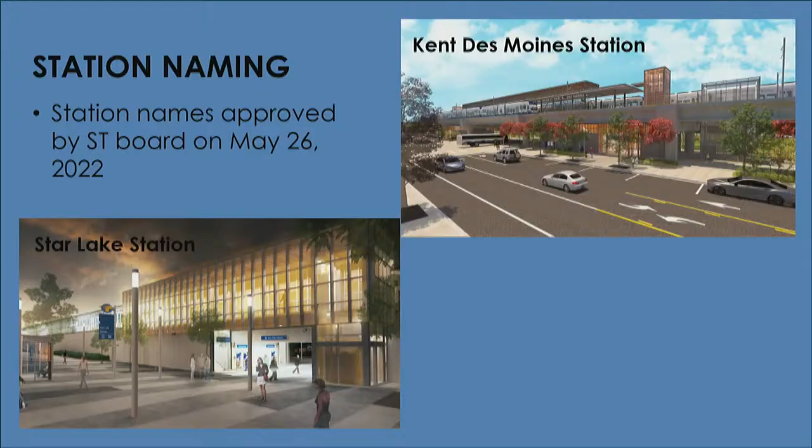A little bit about permit revisions. As part of the design-build process, there's a lot of permit revisions that come in as design progresses. There's been about 785 for the entire Federal Way Link Extension project, about 171 permit revisions for Kent. Within those permit revisions, there are many design changes and smaller revisions that we review. Derek and I do that on a daily basis, look at them and approve them, and then those get gathered and incorporated into a permit revision. So that 171 number is a little misleading, there are many, many of those, and those revisions are ongoing through the process. There's about 168 permit revisions that are in the works. So lots going on.

Kent Des Moines Station and Garage update.

A lot of the work that's happened since April you can't see, it's all underground. Lots of utility work has happened—water, sewer, storm drainage, communications, power, gas, all that kind of stuff underground. That's nearly complete on the Kent Des Moines Station area.

Structure B, which I'll show you again where that is—that deck is complete, being prepared for track. The garage concrete work is complete to the 4th level, so that's a big milestone. The garage is basically built, at least the concrete pours are completed, and the large crane is demobilized off the site. Now they're working on the canopy and some framing and whatnot on the garage.

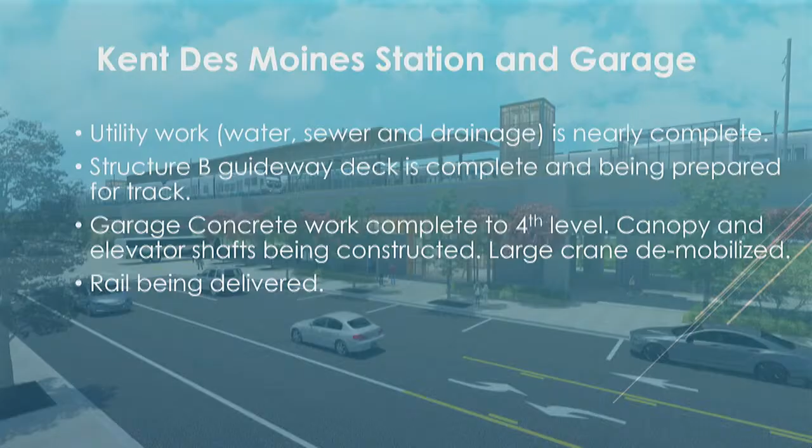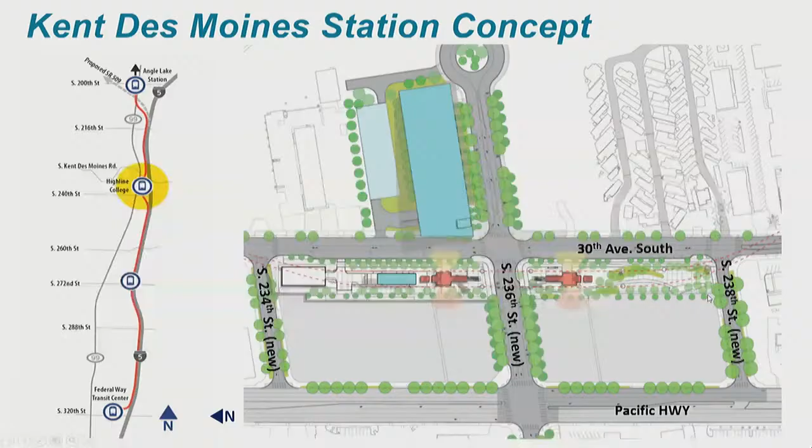That's kind of a schematic of the Kent Des Moines Station that you've seen before. North is to the left, my left, 30th Avenue up here, Pacific Highway down below, and then there's three new roads connecting between 30th Avenue and Pacific Highway. This is kind of the general alignment.

It's a little hard to read, but that's the general alignment of the Kent portion of the Federal Way Link Extension. Starts here at Kent Des Moines Road, continues down through the Kent Des Moines Station area, continues back here behind Lowe's, continues past the landfill, and continues all the way down to the Star Lake Station at 272nd.

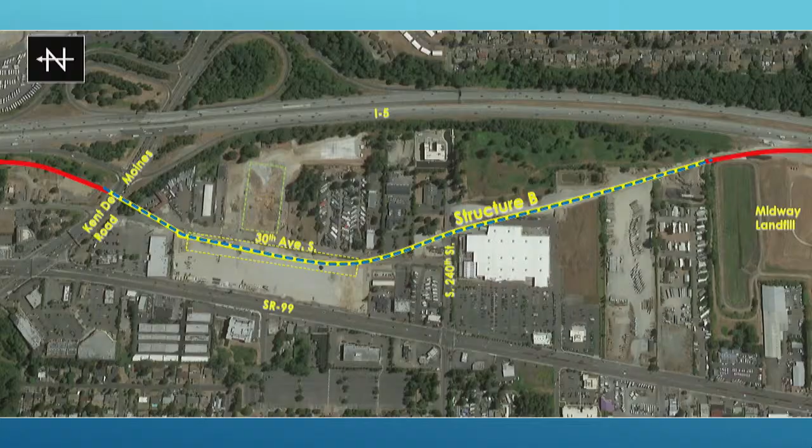This is Structure B. Structure B includes the bridge over Kent Des Moines Road, and the guideway through the station area, back behind Lowe's, and then ends at the Midway landfill. From the Midway landfill south, it continues kind of at grade or fill in between walls.

This is a picture looking north towards KDM Road. As you can see there, the deck is complete on the guideway. The railings are in and getting ready for track. So lots of progress there.

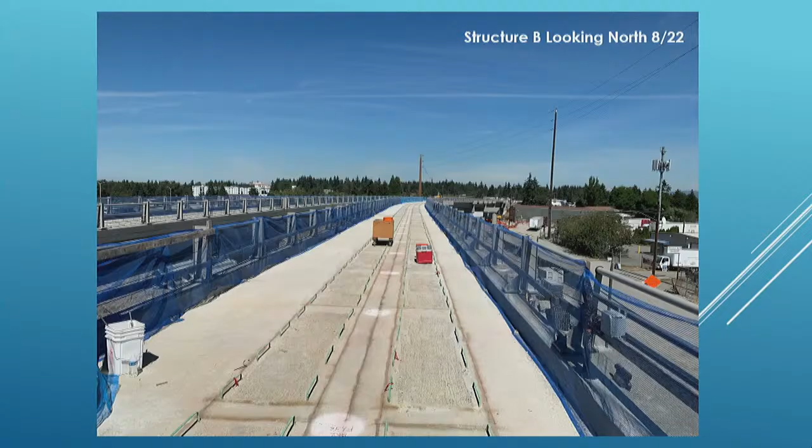There's a picture standing on the deck. Derek and I were able to get up there and look at the deck, which is really cool. You can see there, that's where the track's going to go. They're starting to pour for what they call plinths, which are kind of like the railroad ties, but they're concrete. Those are going to go where the rebar is sticking up, and then the rail goes on top of that.

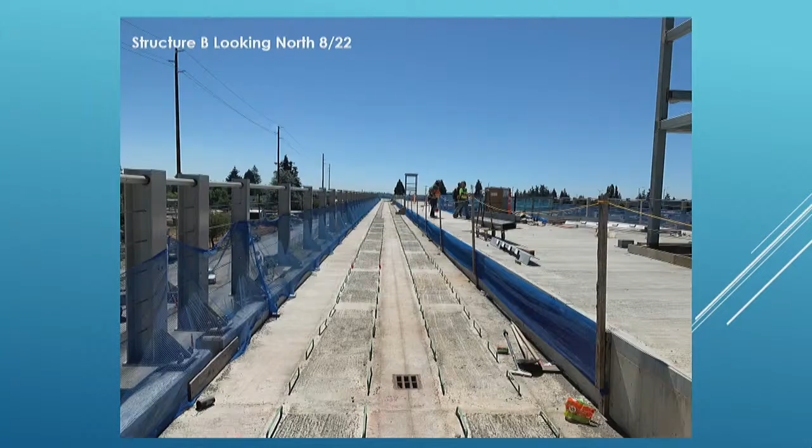There's another picture of the track next to the station platform on the right. And another picture of the track where the tracks are coming together north of the station.

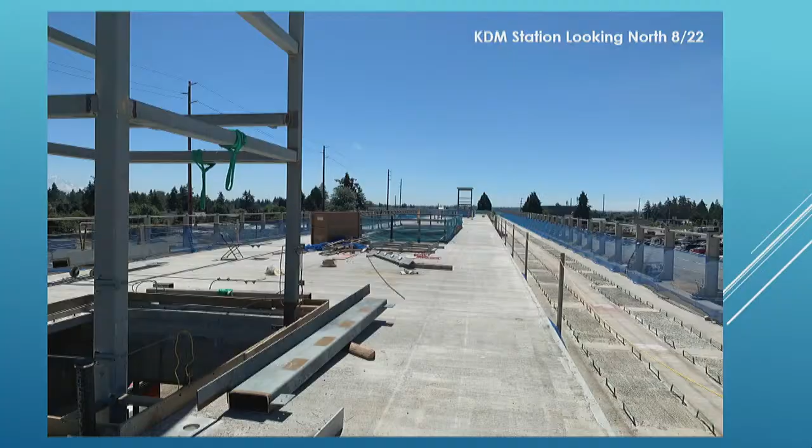And then there's the station platform. There's the north and south elevator shafts. You can see here and here, stairways in the middle, and then tracks are at either side of the station.

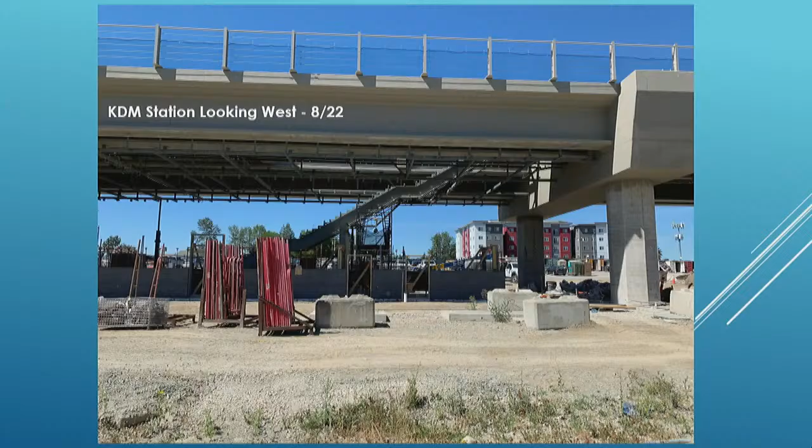And there's underneath the station, looking west. As you can see, they've got the stairway built, and a lot of the framing for the roofing and getting ready for the walls as well, the soffits.

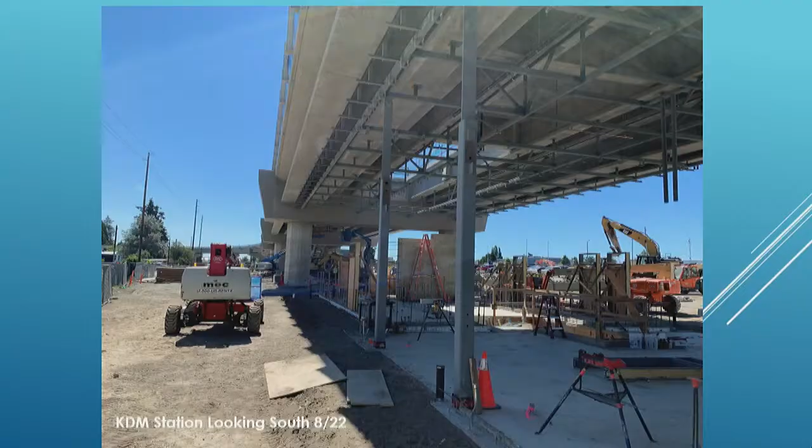And another one looking south, kind of southwest, at the underneath of the station area. We're standing at about 30th Avenue right here. So you can get an idea of what the station's going to look like. The next slide will kind of show that.

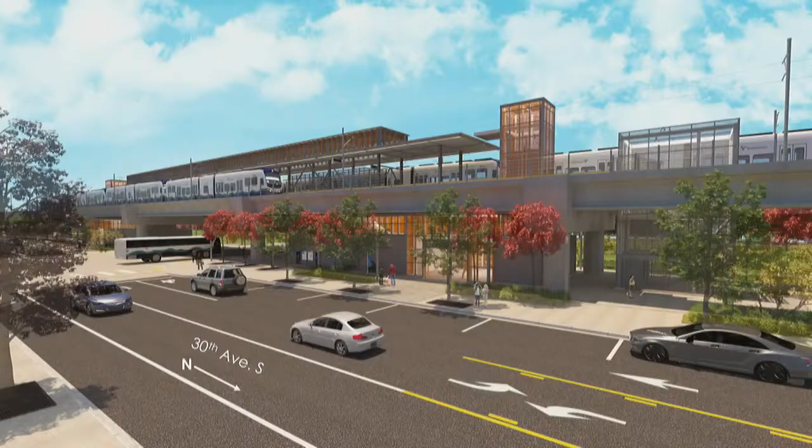So there's a rendering I think you've seen before of that. You can toggle back and forth, kind of visualize what it's going to look like. It's getting to that stage where you can see the final product.

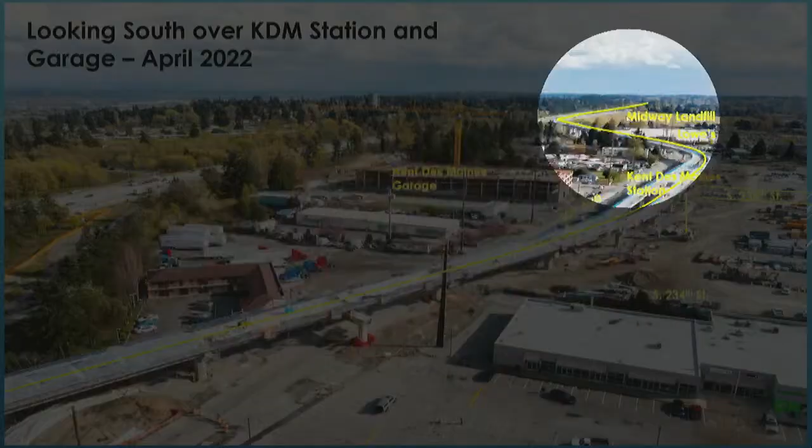So I have some before and after pictures here from April until recently. This is one looking south over the KDM station area—garage is there, there's the station here, this is the guideway. As you can see, they're still working on the final floor of the garage, finishing up the decking on the guideway and the station.

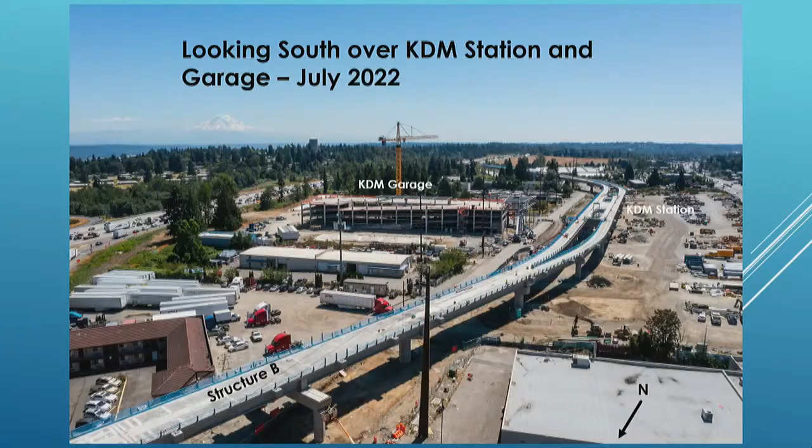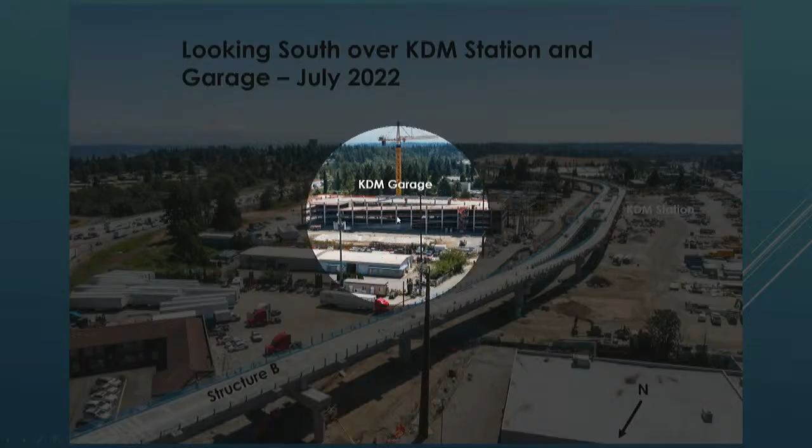And then here's a picture from July—this is the city's drone images here. The decking and station you can see are much further along, getting more completed, getting ready for track. The garage is pretty much built, the concrete anyway. And then they're starting here, as you can see, just the canopy in the front, some of the framing on the top of the roof for the solar panels, and other work is going on there too.

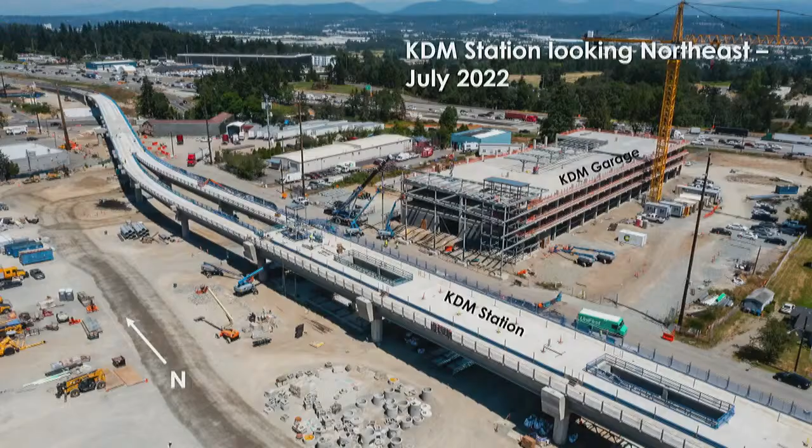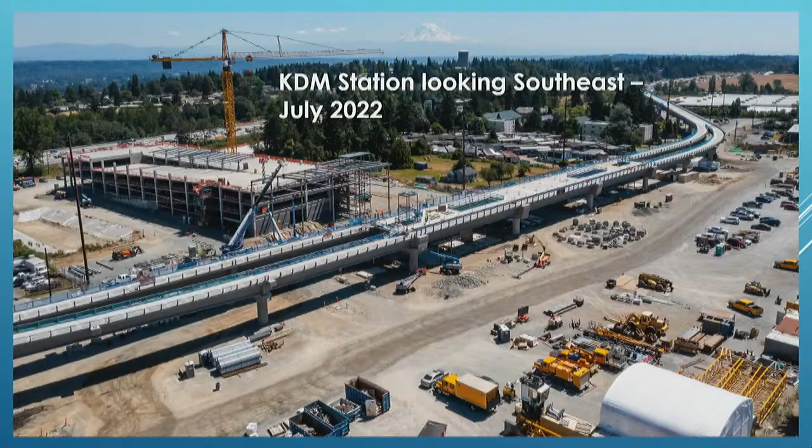And then a more recent picture now, looking at kind of the same angle. It's a better picture. You can see the canopy being constructed in front of the garage and the other framing. Here's another picture, a different angle of that. It shows the canopy well here and the framing up on the roof.

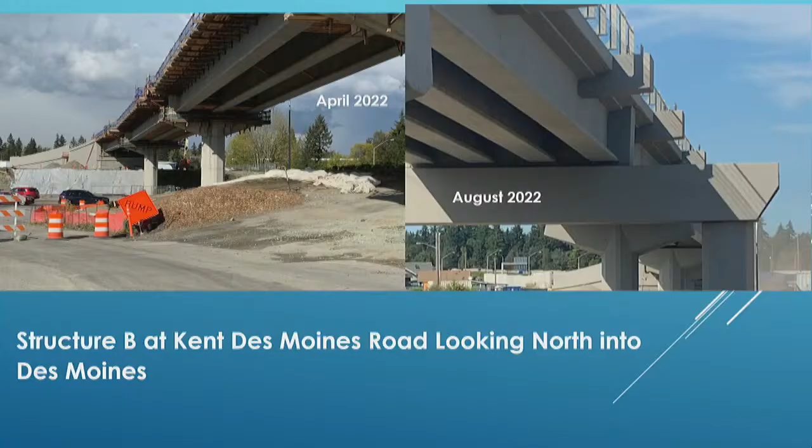Just a quick before and after of the bridge over KDM Road. On the left is April, on the right is August. As you can see, they still had formwork and were completing the structure there. Now it's pretty much done. The railing is up, it's painted, and pretty much done.

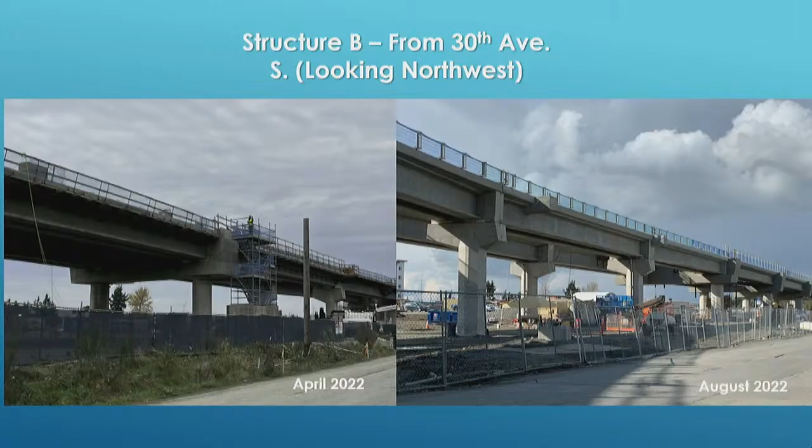There's Structure B guideway looking northwest. Same thing on the left side, it's still getting the formwork stripped off, and then on the right they've got the railing done and getting it finished up. There's before and after of the garage from April until July.

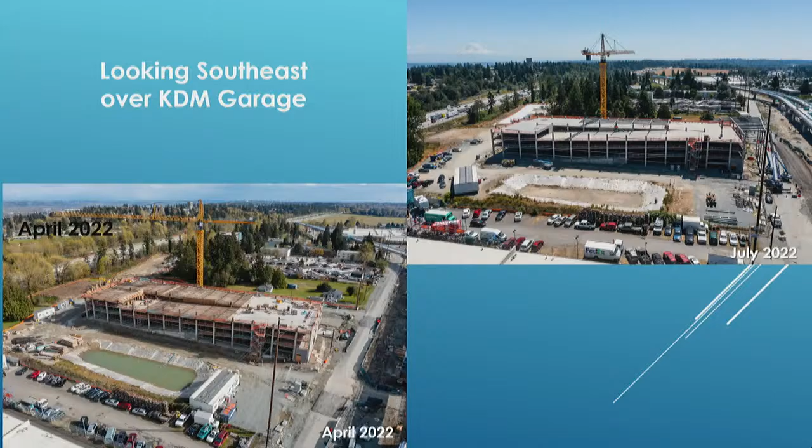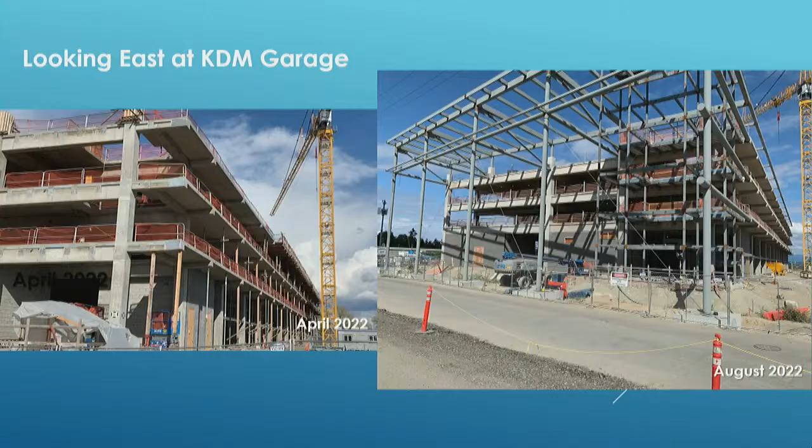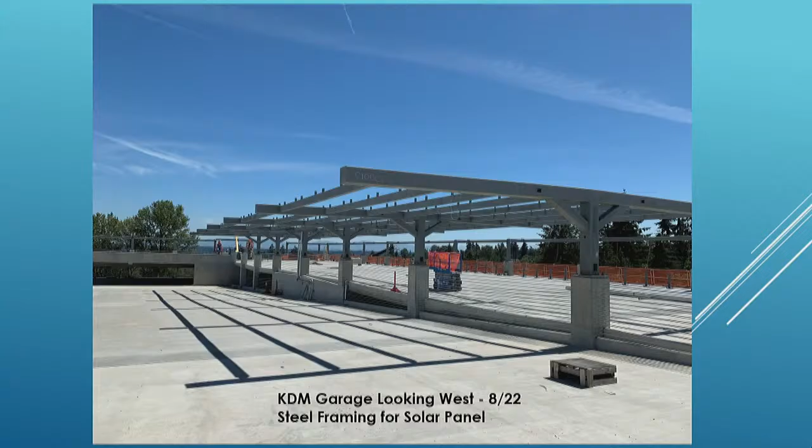This is the elevator here. This is the main entrance for walking into the garage, and then here's that elevator and that entrance. So you're getting to be able to envision what the final building is going to look like there. That's the roof of the garage, the framing for the solar panels.

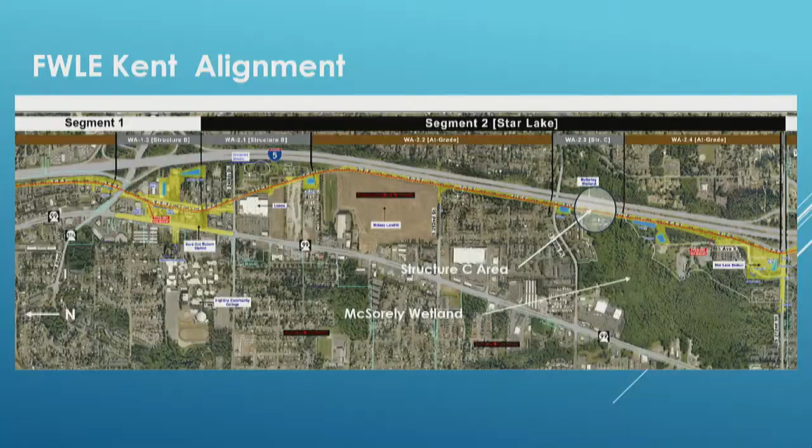That's a picture of the Structure C area looking to the north, and as you can see, the dip in I-5 there. They had a plan where they were working on timber pilings in this area, to be able to prepare a road to put in the shafts and columns and whatnot there. And they had a few blowouts, a few failures. One of the failures, they actually had to close a lane on I-5 until they got it shored up. So they backed off on this area, stopped work, and are re-looking at some other alternatives for how to get through there.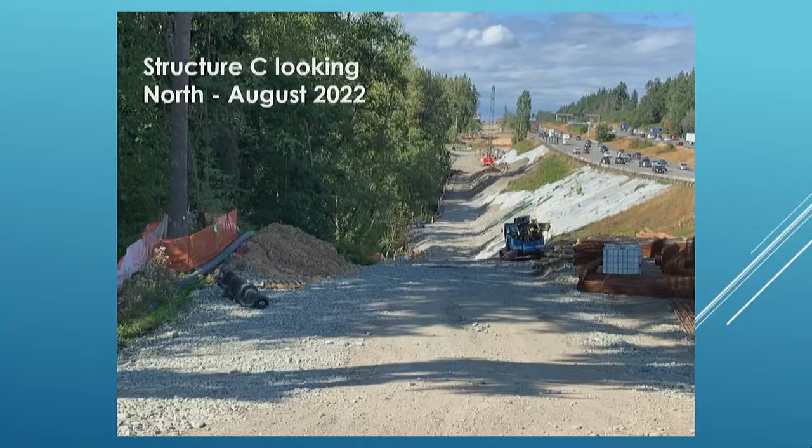So I hear they're close, I think they're down to two alternatives, and close on deciding on one. But then they have to go back to the drawing board, finish the design, and then implement it. So it's definitely going to affect the schedule. It's one of Sound Transit's biggest schedule risks for the Federal Way Link extension. They don't know yet how much longer it's going to go beyond the end of '24 time frame, but it will extend beyond that. They're going to let us know as soon as they know. So they're working on it very diligently, it's a big concern that they have.

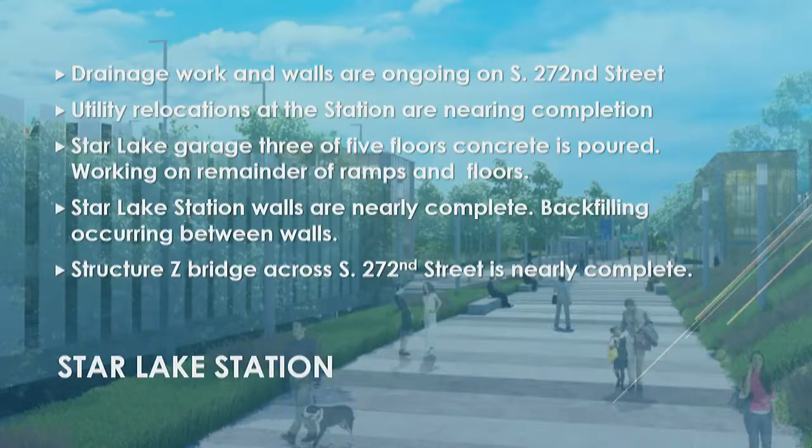So onto the Star Lake Station area, the drainage work and walls are ongoing on 272nd. If you've driven out there, you've probably seen some of the traffic modifications happening there. They've got half the roadway closed off to do drainage work and retaining walls and whatnot. Utility relocations at the station are near complete. The Star Lake Garage, three of the five floors of concrete are poured, and they're working on the remainder of the ramps and floors. Star Lake Station, the walls are nearly complete and they're starting to backfill between the walls. And the structure Z, which is the bridge crossing 272nd, is nearly complete as well.

And then here's just another kind of schematic of the station area. North is to your left. There's I-5 up on top, 272nd. 26th Avenue is the main entrance to the station area, and there's the garage and the station.

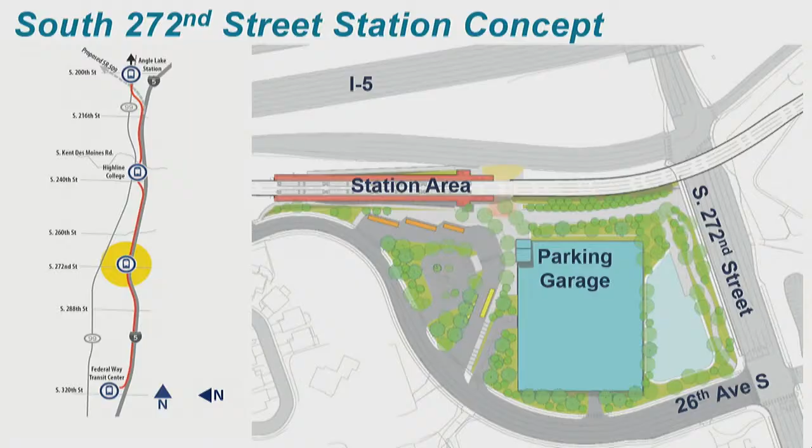Here's a city drone image looking south, back from July. As you can see, the station here, they've got the walls in and they're starting to fill in between the walls. The garage, they're getting up to the 3rd floor constructing it, and the bridge crossing 272nd is almost complete.

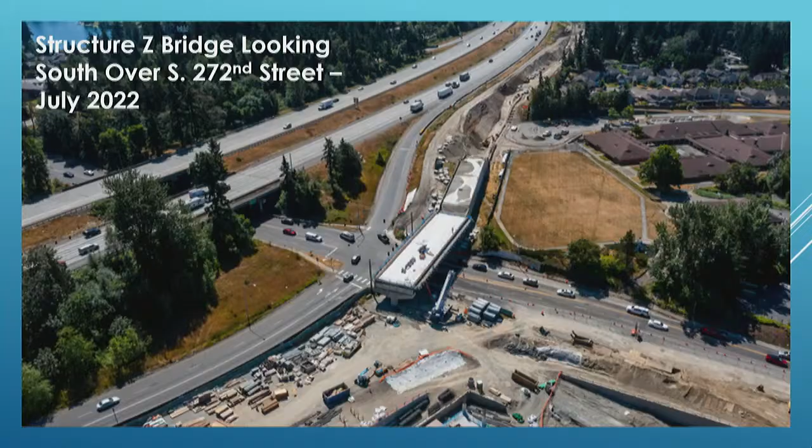Another picture of the bridge across 272nd. Here's the before and after. On the left is April, they had just installed those girders then. On the right is August, and the girders are up and the bridge is just about done. The decking is done, railings are on, it's painted and just about complete, ready for track.

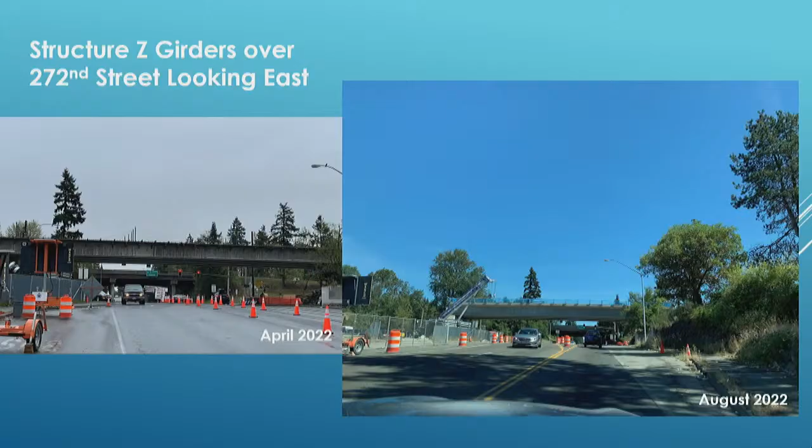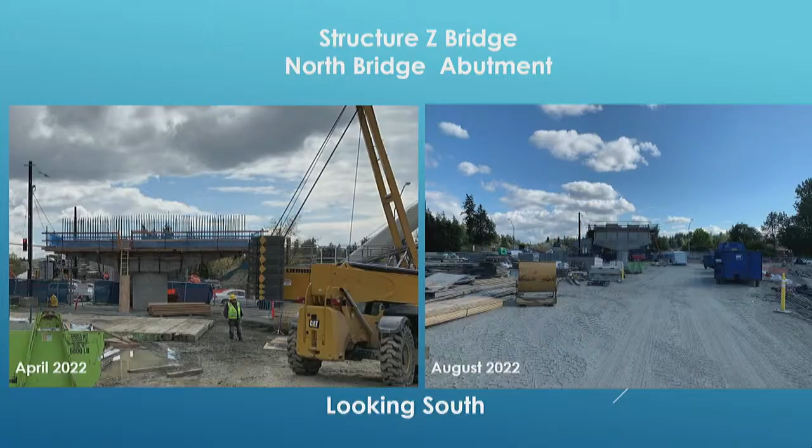There's an abutment, so we're looking south. Here's the north abutment to that bridge. On the left it's still under construction, getting ready for girders, and on the right it's pretty much done and waiting for the remainder of the walls and track to come and meet it.

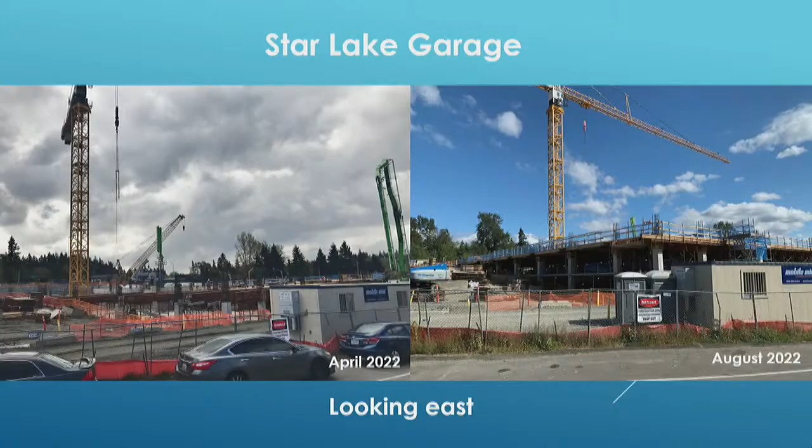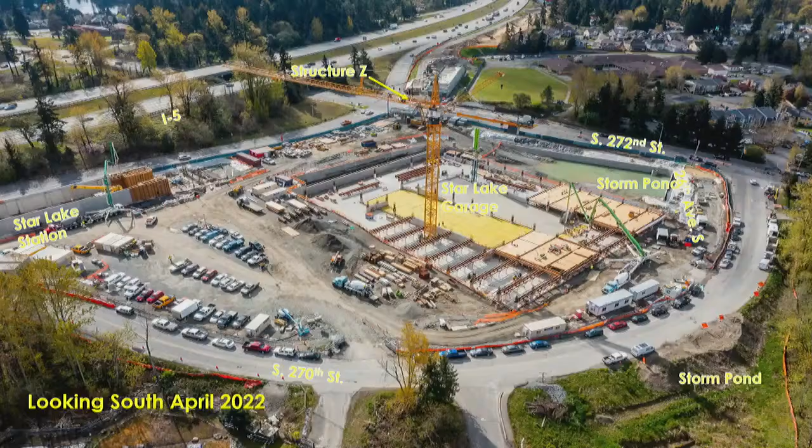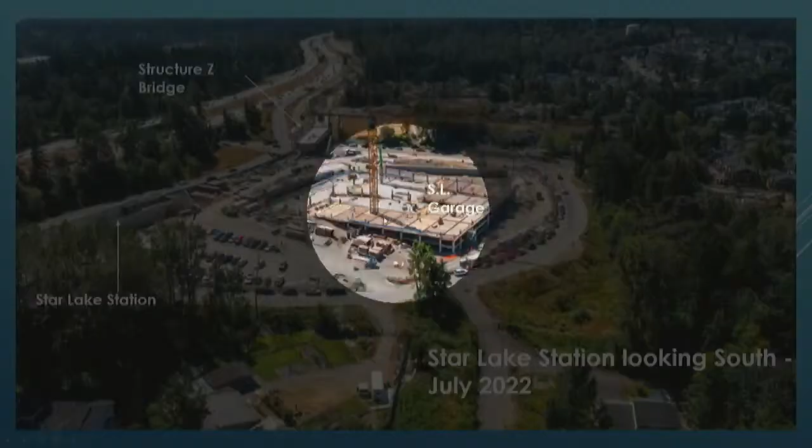There's another one from April, the city's drone image looking south. There's the garage in the station area, and I don't even think the bridge is in yet in this picture. Then here's one from July, about the same angle. As you can see, the station area, walls are getting built here, garage is coming up, and there's the bridge.

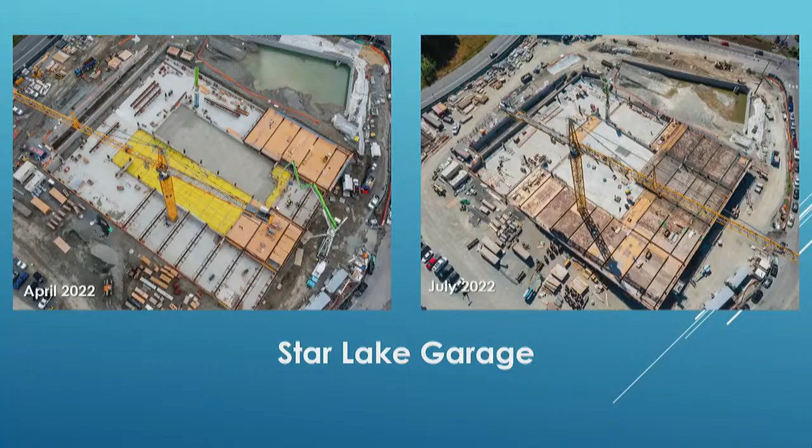So that work is ongoing, it'll be ongoing for many more weeks as they get these walls built. On the north side, then they'll flip over and they'll close the north lanes and reroute traffic over there while they build the walls on that side.

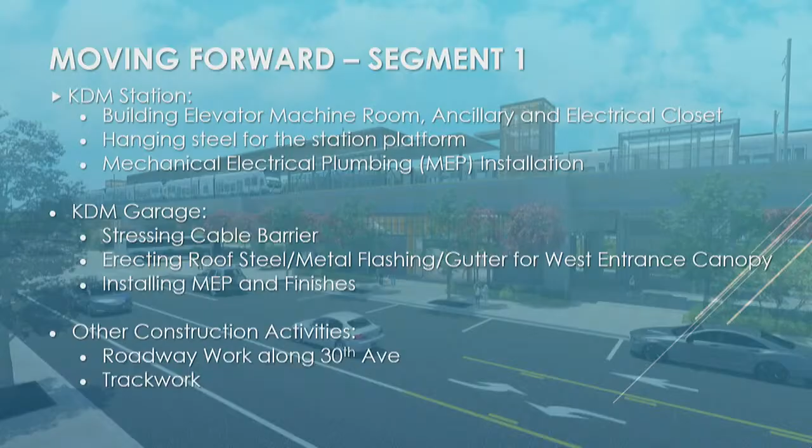So moving forward, the KDM station: continuing with the elevator and machine room, the ancillary and electrical closets as part of the station, hanging steel for the station and the platform, mechanical, electrical, and plumbing installation, and all the finish work. KDM garage: stressing the cable barriers for the garage, erecting the roof steel, flashing gutters, continuing work on the canopy, mechanical, electrical, plumbing, and finishes on the garage. And then road work, like I mentioned, the concrete work on 30th Avenue, and then track work.

And then moving forward on segment 2, the Star Lake portion: they're constructing the final walls and platform beams, pouring the slab on grade for the station, mobilizing for the ancillary building, which is just north of the station. The garage, pouring the remainder of the decks and ramps there, post-tensioning those, and then continuing work on 272nd walls, which is going to be a concrete roadway also from I-5 going down south to 26th Avenue will be concrete on 272nd. And then building the city's detention pond and just final utility work on 26th Avenue.

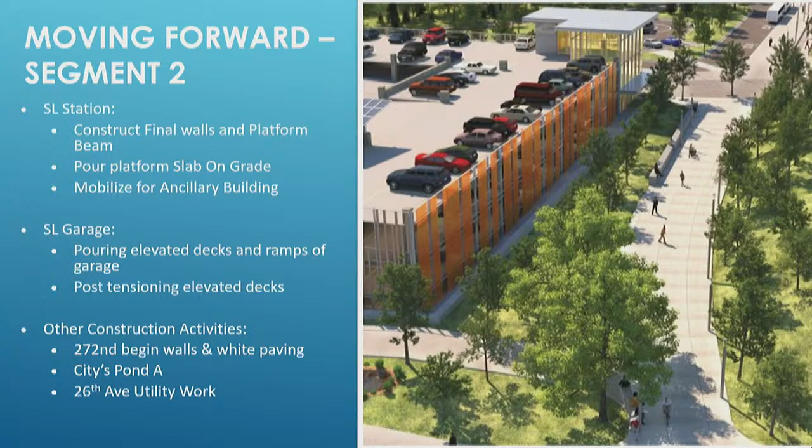And then I'll just talk quickly about the mitigation, traffic mitigation work. These are intersections that were identified needing improvement for the additional traffic that will be generated when the project opens. There's 5 locations: Pac Highway and KDM Road, Military Road and Reith Road, 272nd and Military, and then 272nd and Star Lake Road, and Pac Highway and 272nd.

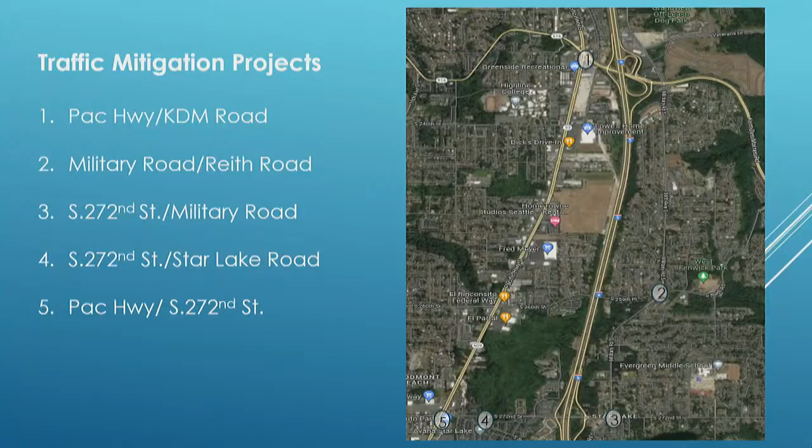And we've been working closely with Sound Transit and their engineers on the design for those intersections, getting it up to a point where they can purchase right-of-way, which is really the critical path for those to get moving forward. And we're nearly at that point now, so we're in a good spot with those.

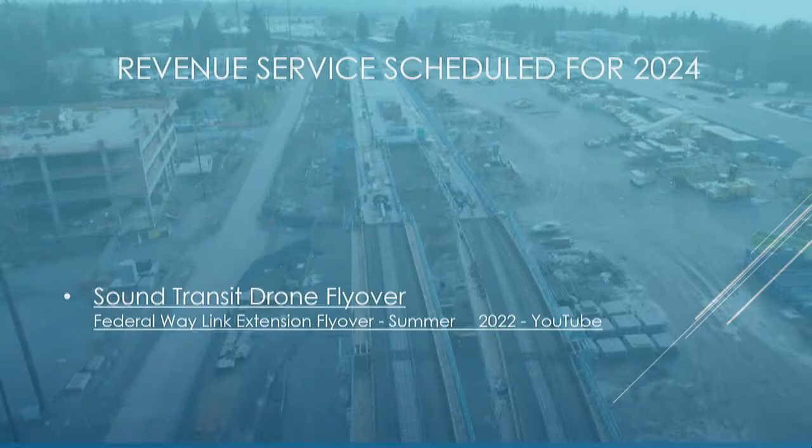So, as I mentioned, the 2024 completion is probably going to get extended. We'll keep you posted on that, and the issues at Structure C. There's also a Sound Transit drone flyover of the whole extent of it, which is really cool to watch. I'll send you a link, and I encourage you to take a look. It really gives you a great perspective on the status and progress they're making.

So I'm happy to answer any questions. That's all I have. That's a lot. Thank you so much, I appreciate it.

Things seem to be going smooth. Are there any concerns, a hiccup? Not really, other than Structure C, I think things are going pretty smoothly. They got past the concrete strike. They're having the normal supply issues and labor shortages everybody's facing, but I think they're such a big organization and such a spotlight project that they're able to keep things moving. So other than Structure C, I think they'd be really close to being on schedule.

And the relationship still going well with us and Sound Transit? Yeah, pretty much. Yeah, well I'd love to hear that. So far, that's good. We'll try to keep it going that way. Okay, all righty. Madam Mayor?

Mark, in some of my conversations with Sound Transit, I'm hearing potentially more like 2025 for opening. Are you guys hearing that, depending on which options they choose for the span or the wall? Yep, yeah, sometime in 2025. They haven't nailed down the date yet, but that's what we're expecting. So it definitely won't be 2024? It definitely won't be the end of 2024. They've told us that.

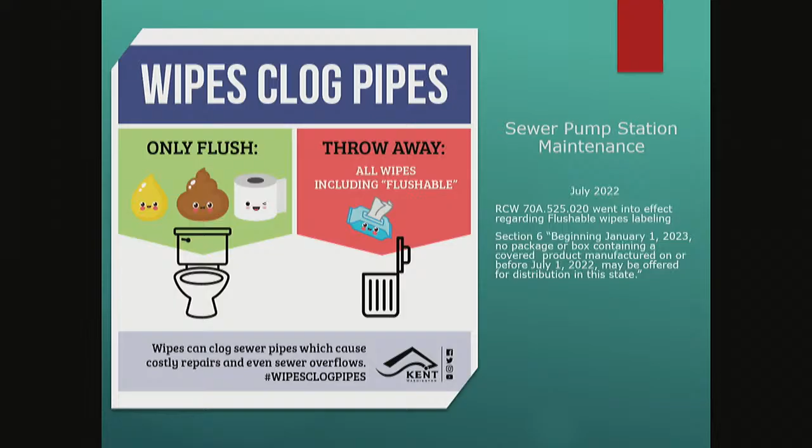Wipes clog pipes - so good news right there off to the right, July 2022. This is good stuff. RCW 70A.525.020 went into effect regarding flushable wipes labeling. Section 6, beginning January 1st, 2023, no package or box containing a covered product manufactured on or before July 1st of this year may be offered for distribution in the state. I've got a feeling we're going to start seeing more states follow suit if they haven't already. That's good news.

However, it's a habit that's going to be tough to break, and I've got a very colorful slide coming up for you. So I put this slide together showing all the different sewer pump stations, and as I was looking...

I'll speed right through that slide, or maybe it'll get stuck, I don't know. It's showing all the sewer pump stations here in the city of Kent. Starting at the top, it says Frager Road, very top there. Right now, we've got a grinder project going in there.

Because of the wipes issue and because of the ragging issues that we continue to have and have had, we're installing a grinder pump that'll help us chew that stuff up as it comes through. As appealing as it sounds, it's going to help a great deal.

Also, what's contributing to that now is the Skyline pump station, which would be the third one down off to the left. That is no longer online. That is now flowing gravity all the way down to Frager Road. And historically, they've had a challenge with ragging also, so now we've just kind of compounded the ragging issue down at Frager Road. So that's another reason the grinder is going in to help take care of that.

Kent View is no longer online. That's kind of in mothballs. That was one of the first stations put in for the whole Kent View project over on that side of the river. But as soon as they started expanding it, they built the Frager Road pump station, mothballed Kent View, and that entire area was flowing to Frager Road.

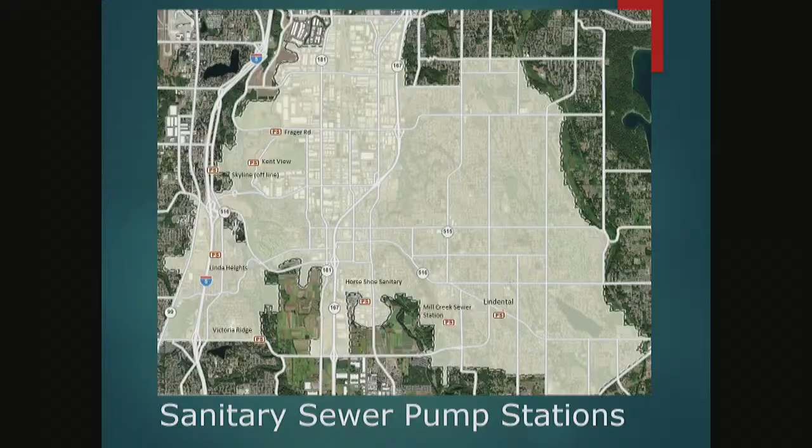And when that station is built, that's going to be a big win for not just my sewer staff, but my pump station staff, the people that have been struggling with that old station for so long, but our design staff also. I think this is the first project I started when I took over the manager role. I jumped into this Linda Heights pump station project, and I can't wait to see it come to fruition. This is a good thing.

Jumping on down to Victoria Ridge, also known as Kently Point, but for our staff it'll always be Victoria Ridge Pump Station. We're starting to look at the generator and the automatic transfer switch there - another pump station that's reaching the end of its healthy life.

So moving on to Horseshoe Sanitary, not a whole lot going on there, but if I had to choose the next two pump stations to get worked on after Linda Heights, it would definitely be Victoria Ridge and Horseshoe Sanitary. That station is another oldie, but right now it's still a goodie, so that's all right.

The station that excites me the most right now is all the way over to the far right, the Lindental Pump Station. I saw that station built, I saw it go in the ground, I was there for quite a bit of it. At the time, I was a pump station technician, so this was a neat project to watch happen.

It's hard to believe that we're at a point right now where it's time to start replacing things. We're putting a new roof on it right now. We're in the process of putting in a new generator and some other hardware stuff that's no longer supported by the industry, so that we don't get caught, so to speak. Heaven forbid a pump goes down and we can't find the repair parts for it. So we're going through that process right now of upgrading all those parts.

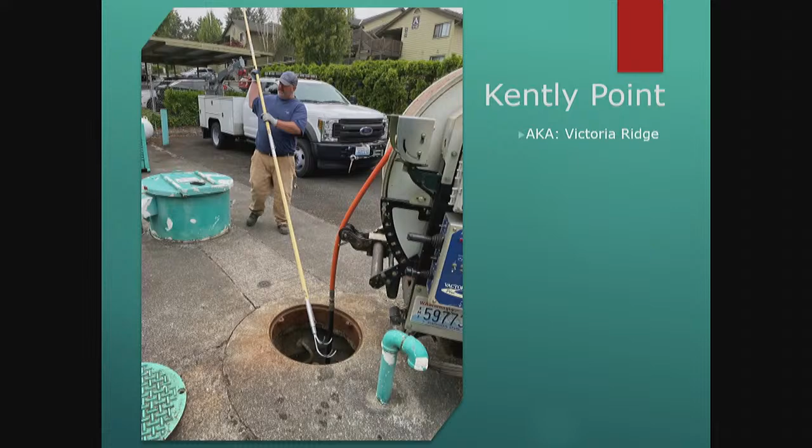All right, let's get over to Victoria Ridge, Kently Point. We're going to go back to wipes clog pipes. Dwayne Oliver is currently our pump station technician, and he's doing a little bit of wet well work. What they do is go in monthly and spin the wells. They drop a high pressure nozzle in there, get it fired up, and start chewing up all the grease and stuff in there so they can pump it out and clean that wet well. Well, this is what he pulled out of there. This is what didn't make it to the pumps, thankfully. Just that wad of rags and whatever else is in there alone can do quite a bit of damage to a pump. And if it gets into two pumps, it could potentially cause some issues within the apartments up there. But he's got it out, and I just thought I'd show that one to you.

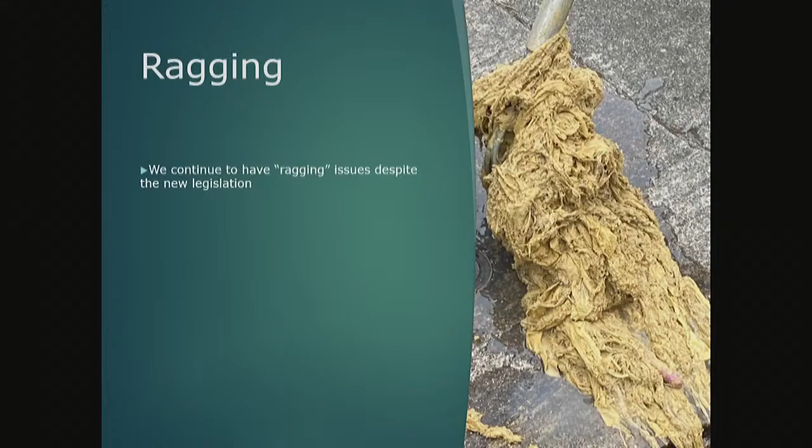Do you mind if I leave it here for a bit, or would you rather me move on? Okay, I'll move on. Madam Mayor, won't you leave it as you have a question? You can switch the slide.

Is it here or at Frager? I've heard a rumor that we're also installing some equipment called a muffin monster. That would be the grinder down on Frager, yes. So I encourage you all to look at their logo, it's kind of a funny thing. I don't know if you can see the picture here, but Google it - this made me laugh. It's got an interesting history, and I don't need to get into those details.

All right, we're jumping into sewer staff work. One of the things they wanted to do this year was a sewer replacement down on Woodford Avenue, between James and the ballpark off of Woodford. Unfortunately, when they went down to pothole, the water table was still about 3 to 4 feet, which would have put the entire sewer project underwater the whole time. So we called that project off.

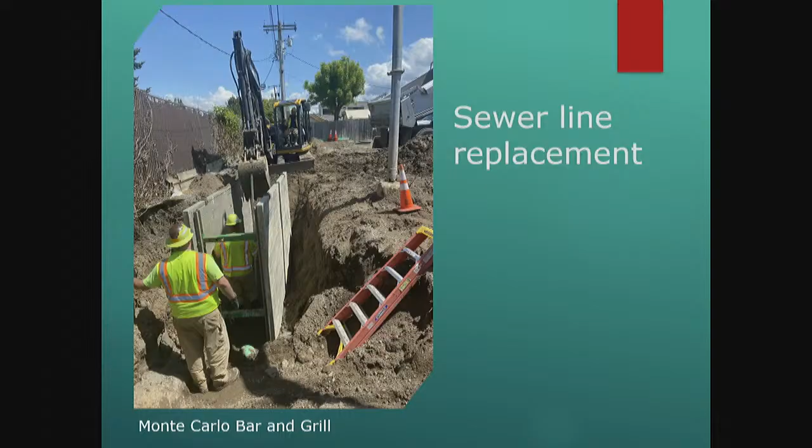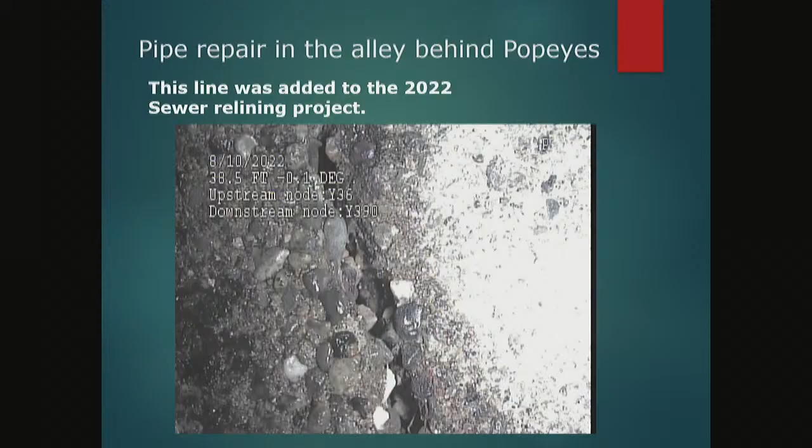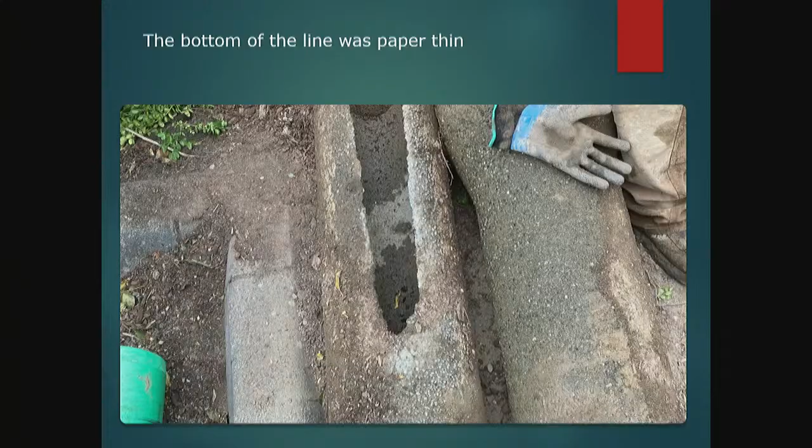So, pipe repair. We had a pipe repair up behind Popeyes, in that alleyway between 102nd and Jack in the Box. One of my operators was up there cleaning the line, just a routine cleaning, and he started pulling back debris - rocks, dirt, and sand. They quickly had to get the TV truck up there to take a look, and what they found was the pipe broken in spots. It's heavily aggregated; this concrete pipe is in terrible shape and definitely needed to be removed. That's actually the bottom of the pipe facing up, maybe a half inch thick. It was failing, and their nozzle actually went down under the pipe and bored out some of the ground underneath it. So they had to go in there, pull all that stuff out, and replace it.

They did a fantastic job on that also. They didn't waste any time, got in there with all the equipment they needed, working within their shoring boxes for protection. They did a fantastic job of getting in there and taking care of that sewer line.

This is what the repair looks like from the inside after. You can see the old concrete line and the new PVC. At the bottom there, sometimes it's really hard to get those inverts lined up, that flow line smoothed out between the two different pipe types. Because of that, that little lip has the potential of catching things - stuff will catch on that lip, rags again and grease and whatever else gets flushed down the sewer line. So what we've done is added this sewer line to the relining project we're going to put out later this year. So this entire sewer run will basically look brand new from the inside - it'll be seamless all the way through, no longer a lip there.

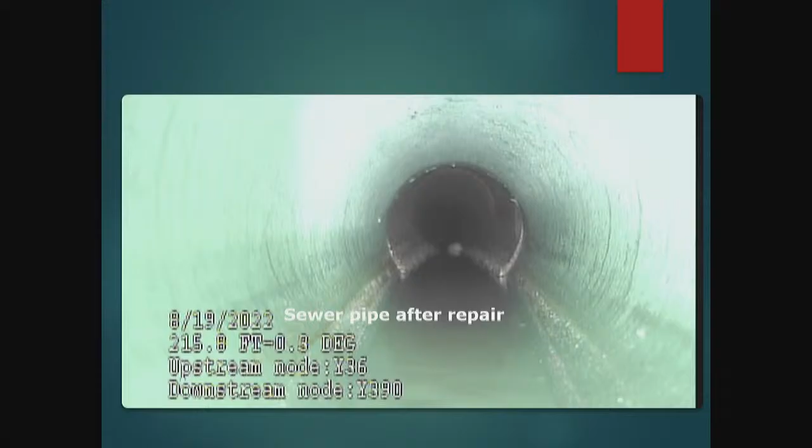They also did that with the lineup at the Monte Carlo. They've added that to the relining list for the year.

Moving on to drainage, storm drainage. Only rain down the drain, it's our motto, we do our best. We've got some fantastic staff, both public and private sewer inspectors, who do a wonderful job of educating our public.

This year, we worked with the street department and design and did a storm replacement that was heavily needed down at the Mill Creek Middle School.

To me, it will always be KJH. I'm sorry, I'm a vandal for life, but it's okay.

That's right, this is at State and Pioneer. The road was in bad shape, and the drainage was equally in bad shape. So we got in there before they did the repaving work, made some improvements in our drainage, and rerouted a little bit of it so that we won't have flooding there on the corner of Pioneer and State.

It was a great project for the guys. It was shallow, so we were able to close the roads down a little bit. There was some summer school stuff going on, but we worked with the principal and the teachers to make sure they had access to the kids.

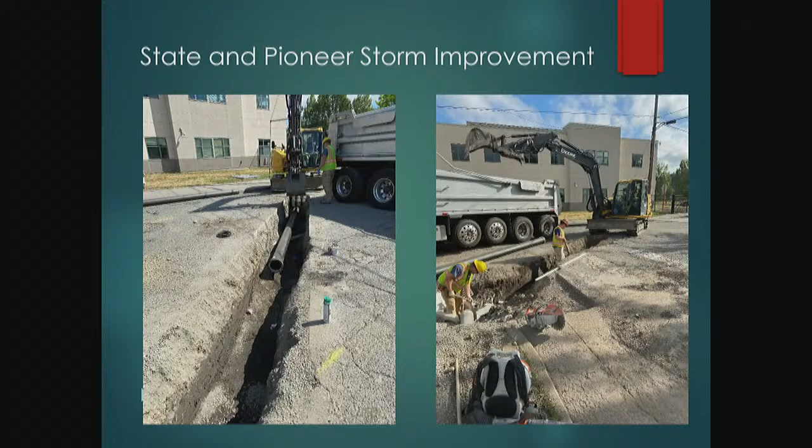Those filters were full. It got to a point where they weren't working, weren't filtering the water anymore, so we had to go up there and remove them.

Because this project is in the bridges, we invited Auburn maintenance staff up to come take a look and see the process. They don't have anything like this in Auburn, they haven't dealt with this kind of structure, this water treatment system. So they came up, which was great, it was good to see them. I think they had six people up watching the process, and they were asking great questions.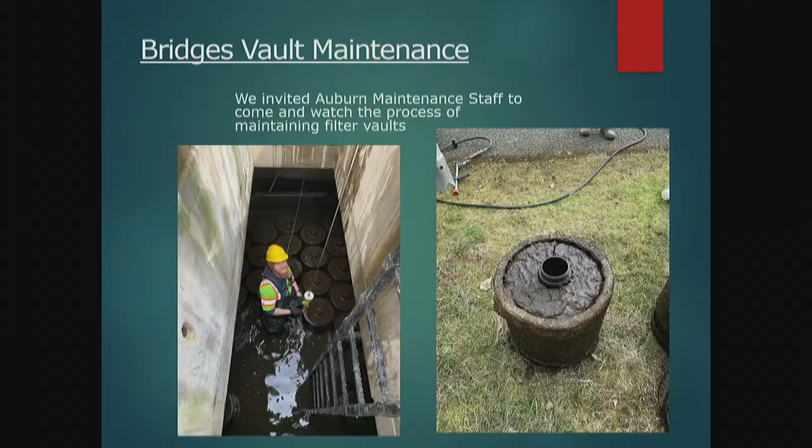So right now we've got CJ in the hole. He's doing the dirty work, really. This is a nasty vault. This is what the vault looks like, just completely empty. And this is a point where we get in and pressure wash everything.

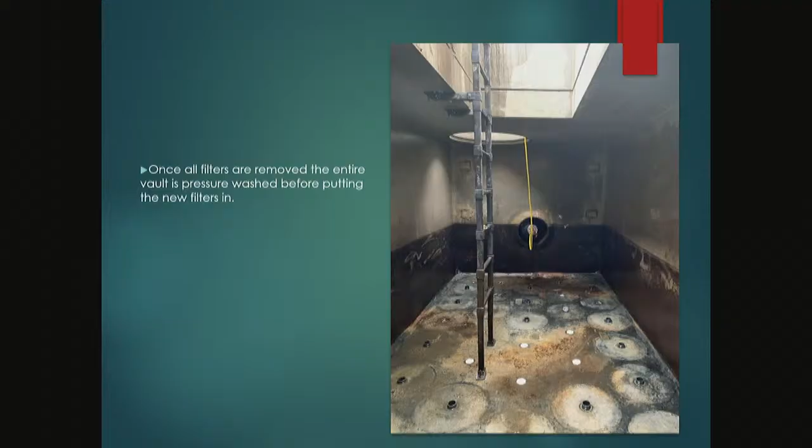In the far wall there's a plug, keeping the storm water from flowing in while we're in there working, getting the station cleaned up so we can install all the new filters. So we pulled the old ones out and installed 44 new ones. Then we pulled that plug. This thing is ready to go, it's filtering water again. We're treating our storm water.

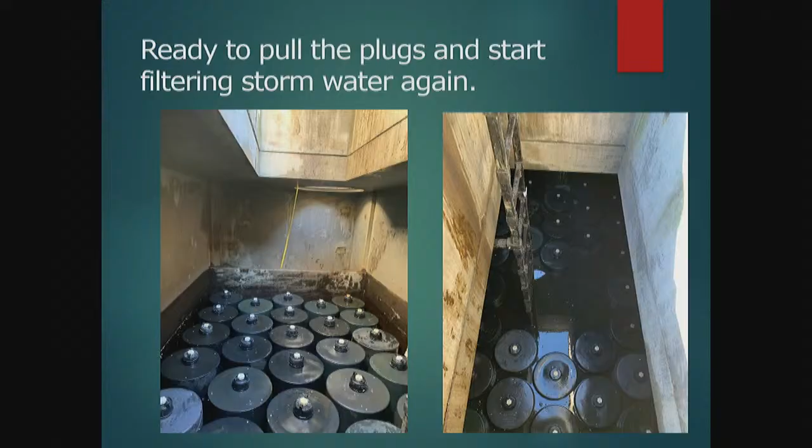What's the cost of the filter? Just curious, what are the costs on a filter? Do you know per unit? I don't have that right now. Okay.

This is just our process. We dewater the pond, we catch all the fish that are in there, and there were a ton of fish this year.

I wish I got a good enough picture. We had big nets, and we were just dumping them into the buckets, putting them downstream in the cleaner water. Our goal is always no fish kill, and we had a fantastic fishing season in here this year.

So after we dewater the best we can, we start loading it up. We get our dump trucks out there, start scooping that stuff up and hauling it over to the Vactor site, where we dump it out and just let it sit where it lays. Then when the project is over, we'll go in there with a loader or whatever, push everything up and straighten the site out. But man, there was so much material this year.

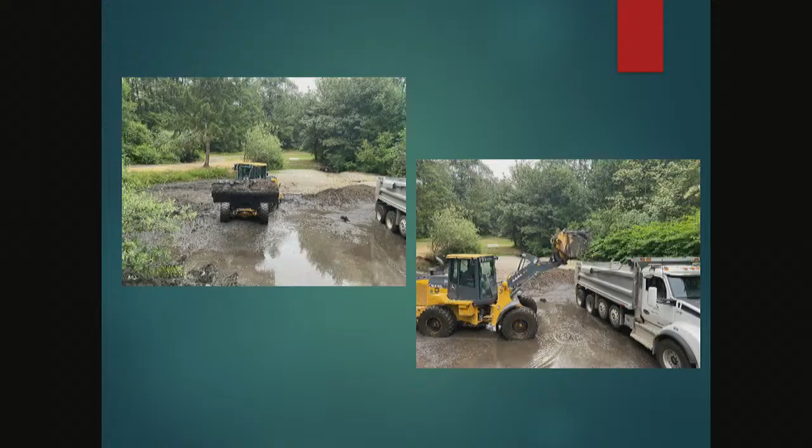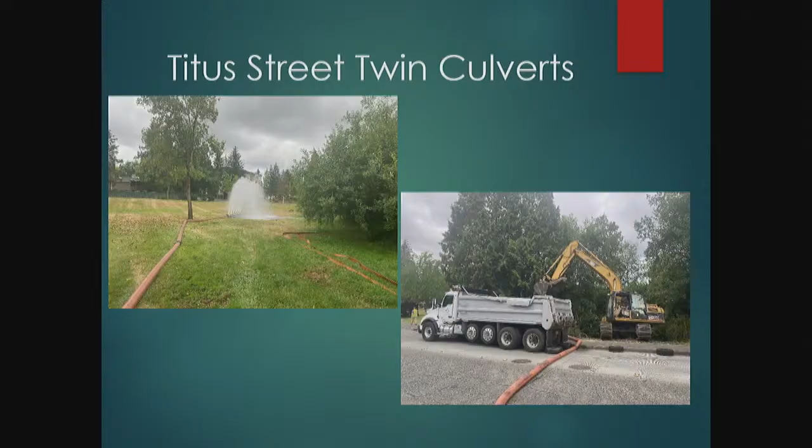Moving on, just up the street was over the Titus Street culverts, the twin culverts that go from Earthworks Park down into the senior center area. This is another one that we do yearly. We have to set up bypass pumping. So we get, I don't know how many hundreds of feet of hose we got sitting out there in that big grassy area out by the senior center property. We pump the water out of our job site so that we can remove sedimentation and gravel.

This is a very successful project this year. You guys did wonderful. Garrison Creek and 212th.

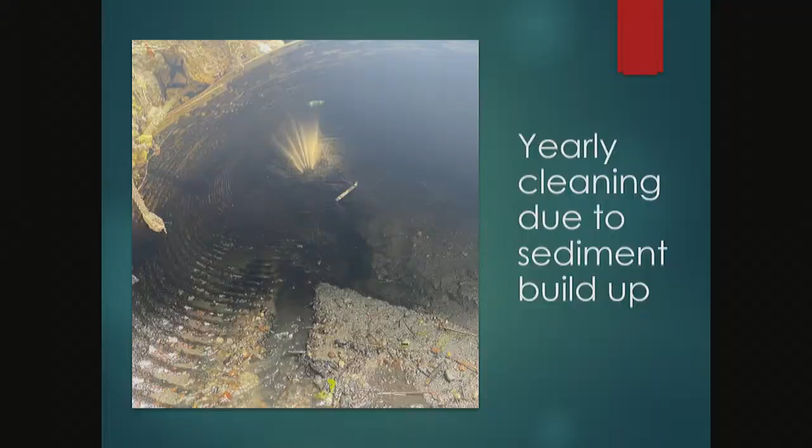This is over just next to Winco, off of 212th. There's a large culvert that flows under 212th, and it's supposed to carry Garrison Creek through. However, the last few years we've been having to go in August when we do our other HPA work and clean that 4-foot culvert. Right now, at this project, they probably had at least 4 feet of material stacked up in front of that pipe. That included our plunge pool being completely full. It was level all the way across. There was a lot of material in there.

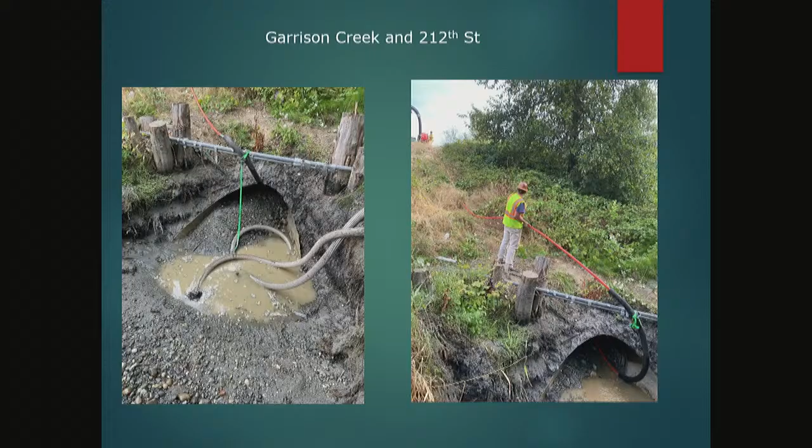But fortunately, they were able to get in there and clean it all out successfully. It was a good project.

And before we shut down, I want to talk about that picture right there. In the bottom right, that's where you see the wall of material that's built up. On the back side of that would have been a plunge pool. That pool was filled up also.

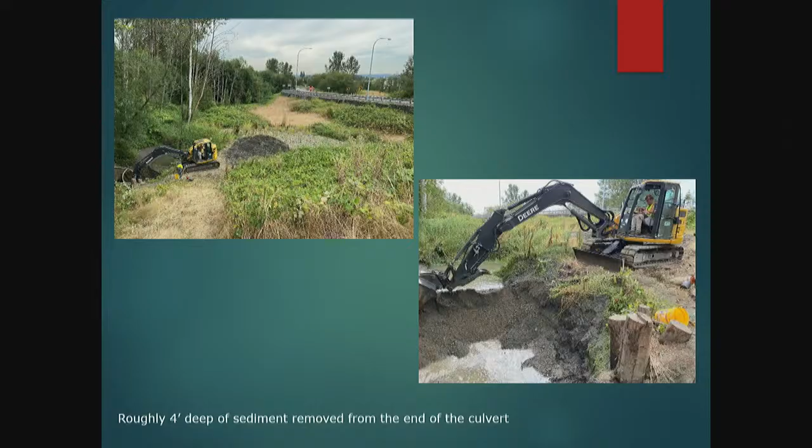The nice thing about this project is we don't have to haul that material off site. Truthfully, logistically, that would be extremely tough to do anyway. But they pile it up and then spread it out before we leave. It'll dry out, and then we'll cover it with our BMPs. That's the site, the way we left it. When the work was done, they covered it with straw, had their straw wattles in there, and made sure they covered their tracks leaving the project.

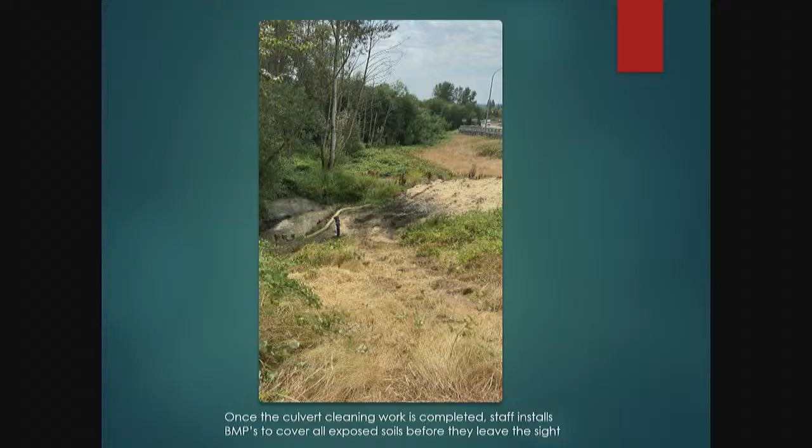And with that, I don't have anything else for you. Open to questions. Well, you didn't let me down.

You did a good job of closing it. So we had 3 great presentations tonight. I know sometimes we take things for granted and just don't know what goes on behind the scenes. This city did a really good job of being proactive, making sure things are taken care of before it's too late. So, outstanding presentation. Yes, sir.

Learned a lot. So, council member, any questions or concerns? Will you agree he closed it up well? Yeah, good job. Okay, thumbs up. All okay, right, wonderful, thank you.